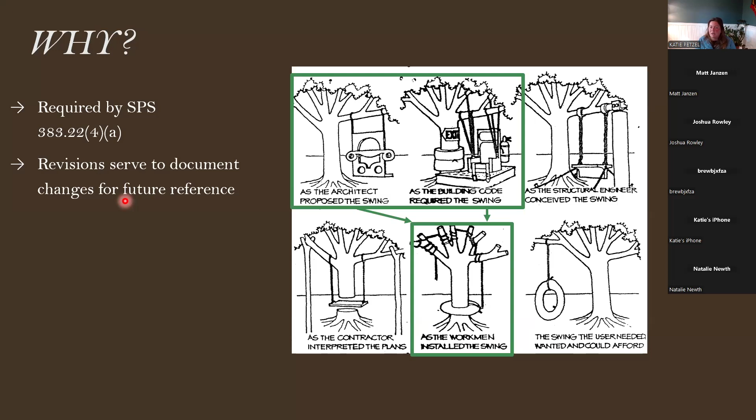But also we submit revisions so that they serve to document changes for future reference. So when we go and look at a system 10, 20 years down the line, or a new inspector or a new plumber looks at it, we actually see on the plans what is on the ground. And that is what plans should be. They should document, as that picture shows, how the workman installed, what the system actually looks like, how it actually functions, not how we dreamed that it would, but how it actually looks on the ground.

So here's the code section of SPS 383.22(4) revisions. And we'll go through this through the presentation. I'm not going to read it all out loud to you here. That would be boring, but we'll get through it all as we go. But as you can see, this code section actually is not that long, but it covers everything to do with revisions.

So when is a revision absolutely required? When does 383.22(4) say that revisions are required? Well, first, it is required absolutely when there is a modification to the design of a POWTS that has been previously granted approval, if it involves any of the following as we go along, and it should be submitted to the applicable reviewing agency for review.

So let's say a facility was originally designed for an office space, and they come to find out that what's going to be in the building is actually a restaurant, and the plan review is still active, the sanitary permit is still active. Well, they can do a revision, and they need to do a revision because the contaminant load from an office space to a restaurant is completely different.

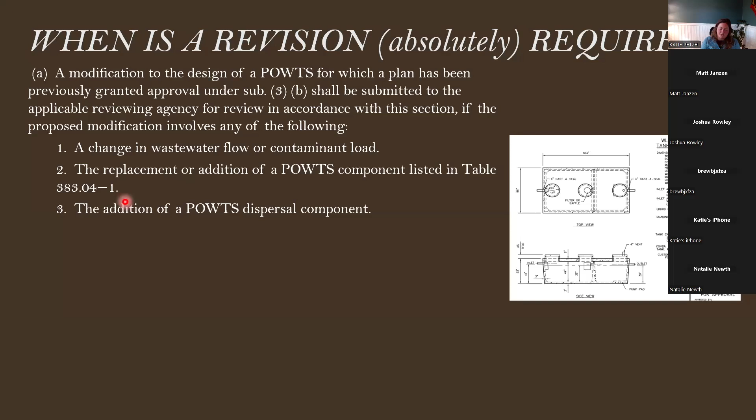Anytime there is an addition of a POWTS dispersal component, a revision is absolutely required. So if we were to have a holding tank permit, for an example here, a 1200-800, and we're adding the distribution dispersal component to it, then a revision is absolutely required. These are all pretty obvious, hopefully, but that one more so. But additionally, anytime there's a change to one or more of the dispersal components involving any of the following. So if the location of the dispersal component is outside of the suitable evaluated areas or proposed depths or elevations.

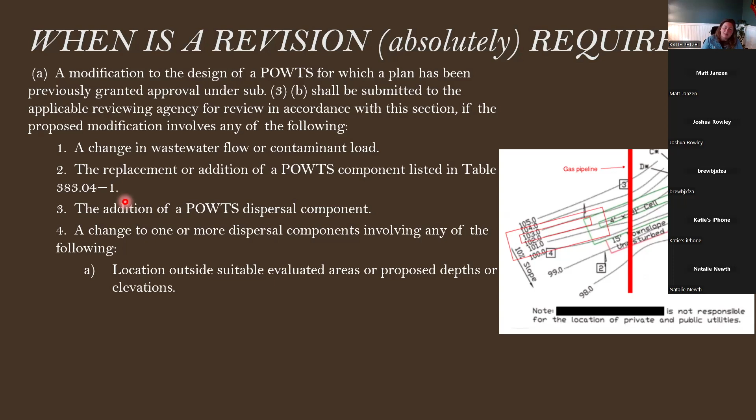So I have an example here that is completely made up. This is not a real scenario. But for example, if a soil test was done and it comes to be that there's an encumbrance there, so my made up scenario here is there's a gas pipeline where the cell was proposed to be, and it has to be moved. So the cell in this hypothetical scenario had to be moved outside of the tested area. It's still on the same contour, but additional borings will be required, and because of slopes and things like that, other things will have to be changed with the plan.

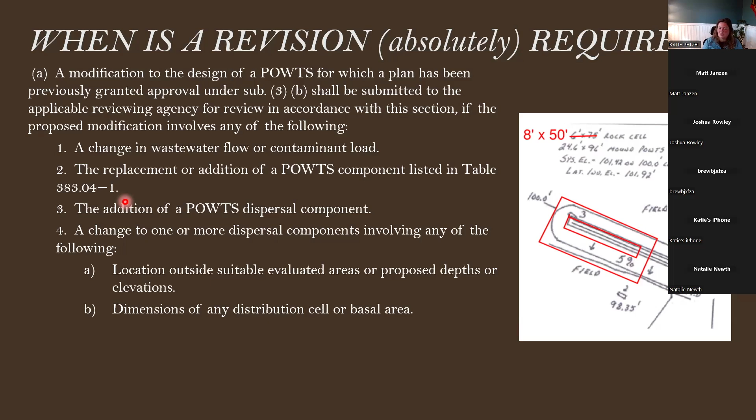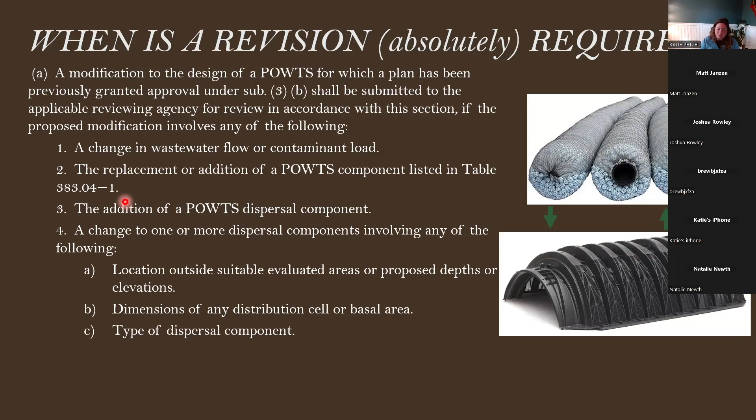Anytime there's a change to the dispersal component dimensions, anything with the distribution cell or the basal area. So my made up example here, we're going from a 6x75 rock cell to an 8x50. Now it's a change to the distribution cell dimensions, and it would be a change to the basal area, so that would require a revision. Anytime there's a change of the type of dispersal component, so an example here going from EZflow to infiltrators, that would be a change, but it could be anything.

Or a change to the design of a pressure distribution component, except for changes to pumps, force main lengths, total dynamic head, or pump control settings. So my example here, the plan hypothetically originally had 3/16 orifices, and for some reason was changed to 5/32. So that would be a change to the pressure distribution component, and it would require a revision.

But if there was a change to, say, going from one type of pump to another, that would not necessarily require a revision. Or if the force main length goes from 50 feet to 100 feet, it wouldn't necessarily require a revision. Total dynamic head and pump control settings, likewise, those do not require revisions. So now that we know when revisions are absolutely required, we're going to go through who it should be submitted to. So who is the applicable reviewing agency? So who is it?

Plans that must be reviewed at the governmental level are those POWTS that serve not more than two one- or two-family dwellings and their accessory buildings, and use gravity distribution for the effluent to an in-ground distribution cell and/or a component manual design. Additionally, it would be holding tanks that are less than 3,000 gallons per day estimated flow and our component manual reviews.

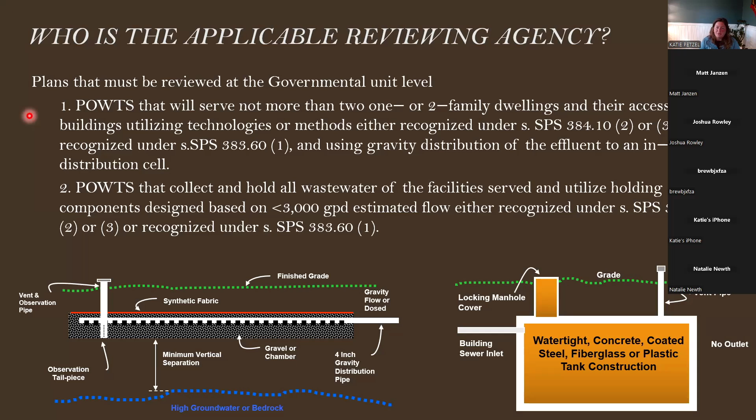So these are the applicable reviewing agencies. You're very familiar with these. And it's no different than who you would submit the plan review to. The revisions go to who the plan review would go to. So what plans can be reviewed either by the state, DSPS, or as a designated agent?

So these would be POWTS that completely utilize treatment and dispersal technologies that are approved under SPS 384.10(2) or (3) or 383.60(1). So those are the component manuals, and anytime that reference is in there, it's referring to the component manuals. So things like a standard mound, a standard at-grade, an Elgin mound, whatever. If it's a component manual review, then it can be submitted either to the state or to the designated agent if the county or local government unit, if you're in Milwaukee, has that designated agent status.

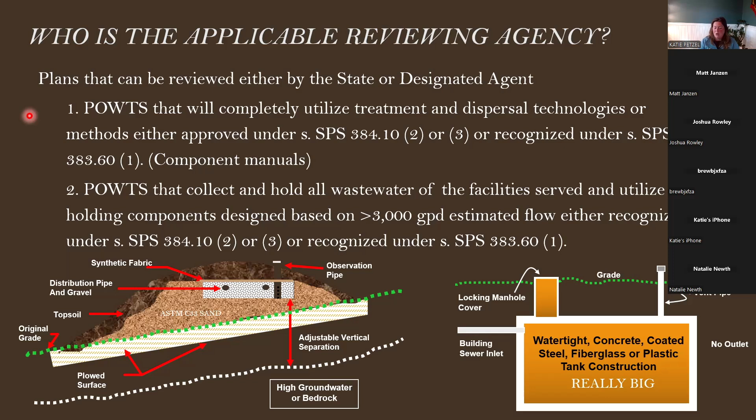Additionally, it could either be submitted to the state or to the designated agent if there is a holding tank that is a component manual holding tank that serves above 3,000 gallons per day. So just a really, really big holding tank. So those revisions would be submitted to those people in that case.

Also, any POWTS that treat domestic wastewater combined with industrial wastewater, which in the most recent component manual updates we made more clear that those are individual site designs, as well as experimental systems. So any of those plans that were reviewed at the state level must have their revisions submitted to them at the state level.

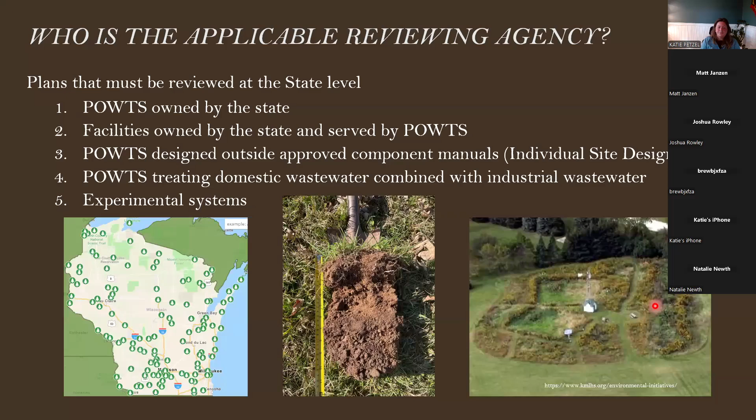Okay, so as a reminder, we're getting through the code sections here. They're not exactly in order, but here's section E. If revisions are submitted to and approved by the department, the owner of the site for the POWTS or the owner's agent shall file the revisions with the governmental unit which issued the sanitary permit. So that's there as a requirement that if you get revisions approved for a state-approved plan, then those revisions must also be filed with the governmental unit who issued the sanitary permit.

So in most cases, that's going to be the county. You have to submit your revisions to the county so that it's filed away with those original plans. Or if it's a state-owned project and state-issued sanitary permit, then it has to be filed with the state. If you're filing revisions to state-owned plans, it's all through eSLA. We all know where it is, so it's filed along with it.

Okay, so additionally, in that section, 383.22(4)(b), like I said, we're going a little bit out of order, but I thought this would be the appropriate order to talk about it. If there is a modification to the design of a POWTS for which a plan has been previously approved and has a sanitary permit, it may be submitted to the governmental unit which issued the sanitary permit if the proposed modification involves a change which is not listed in paragraph A, which was those major revisions that we went through, a change to the dispersal component, a change to the pressure distribution network.

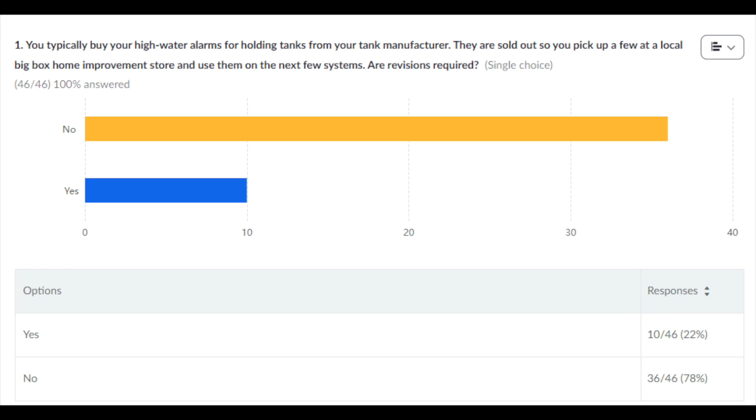The answer to this one is no. A revision is not required for this. Should it be noted on the inspection report and on the plan? Yes, but is a revision required per 383.22(4)? No. The high water alarm is not an approved product. It is what it is. It does its job, and if it can do its job, it should be noted what that alarm is, but a revision is not required.

All right, question number 2. Is a revision required? A house plan has changed from a full basement to a slab on grade. It was to be served by a proposed state-approved pressurized at-grade. You now have enough elevation difference to make a gravity at-grade work, and that is the preference of the homeowner. Is a revision required to go from pressure distribution to gravity distribution?

It's a change to the pressure distribution component, which there is no longer one. And even though it's the same component manual, pressure distribution to gravity distribution at-grades, it is a change, and it does require a revision. It could either go to the county if they're a designated agent for at-grades of both types, or it could go to the state if that was who originally reviewed it.

All right, and the third question here. Okay, so on this one, is a revision required? In conversation with the homeowners, you find that they have some rather unusual water usage habits. You decide what they are. You decide that switching from demand dosing to time dosing is best for the long-term performance of the mound component. The plan is state approved. Does this change require a revision to be submitted to the state?

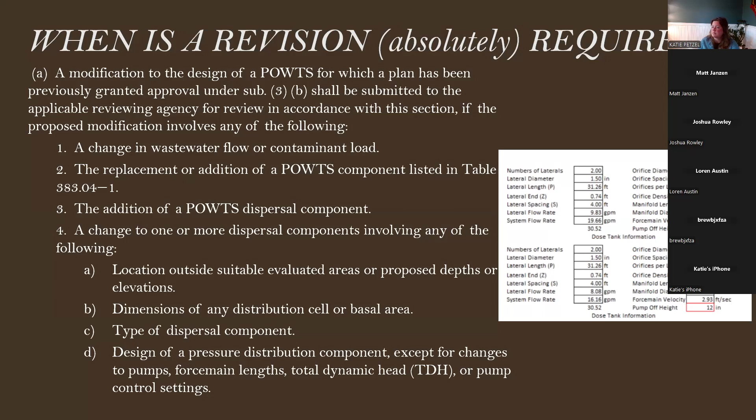So even though some things may not require an actual revision, we still have to make sure that we're noting any changes, or documenting them on the plans or during the inspection process.

Thank you, Matt. Okay, so now we got through when revisions are required and a little quiz on them. I thought it would be helpful because I do see mistakes with this at the state level, state revisions being submitted to the state incorrectly. So I thought it would be useful to go through a few screenshots on how you submit a revision for a state approved plan.

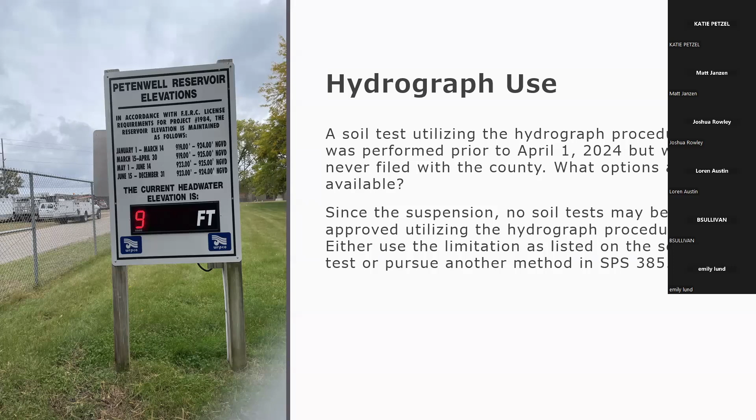State-owned projects. Katie did talk some about this. I've run into this a couple times this summer, but what's the procedure for installing a septic system on state-owned property? I should have had a quiz come up on, we should have put one in here about, what do you need to do? Well, the statutes and code don't differentiate between state-owned and private systems. So the only exception is that the counties don't have jurisdiction, but the state does.

So this means that you still have to do a soil test, still have to get an approved plan, you still have to get a permit, and you still have to get the system inspection. So just like a 3-bedroom home, you still have to go through all the processes normally to install a septic system. It's just that the county doesn't have jurisdiction, the state does. So you can do the soil test, you obtain the plan, we'll review the soil test at the time the plan is submitted. Once you get an approved plan, you have to go through eSLA and submit for a state sanitary permit through eSLA for that site.

And then the inspection will have to be coordinated with the district wastewater person to go out there and do those kind of inspections. So you still need all the same things that you would on any other kind of system. It's just that the county doesn't do the inspections, the plan review, or the permit issuance. Those all come back to the state.

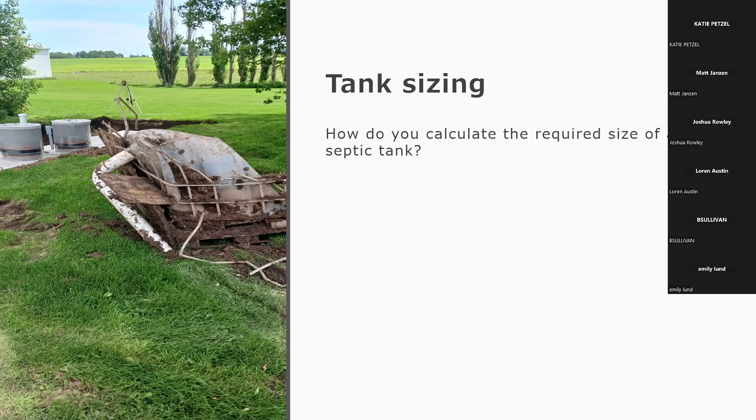All the tank product approvals list the maximum gallons per day for which a tank is approved. So if you look up a certain brand or manufacturer of a tank, XYZ, they will say that this tank is rated for X number of gallons per day flow. It's rated for, whatever, 750 gallons a day flow. So then you know that it's suitable for a 5-bedroom home or a 5-bedroom system, or a commercial facility that is under 750 gallons per day. However, sometimes we get these where we have a tank and maybe it's an older one.

It's still in good shape, but we don't know what the product approval is because it's not a currently made tank, or it's a manufacturer that's no longer in business. So how do we back calculate? If we say, hey, is this tank going to be big enough for me? I need to figure it out, but I know how many gallons it is. What's the size? You can multiply. There's a magic number, 2.088. That'll give you the size needed.

So for example, a 450 gallon per day system, a 3-bedroom home, times the 2.088 would give you 940 gallons. So that would be the minimum size tank for a residence. But remember, this is for the 3-year service frequency. So I do have the formulas out there. If somebody's interested, I can share that with you.

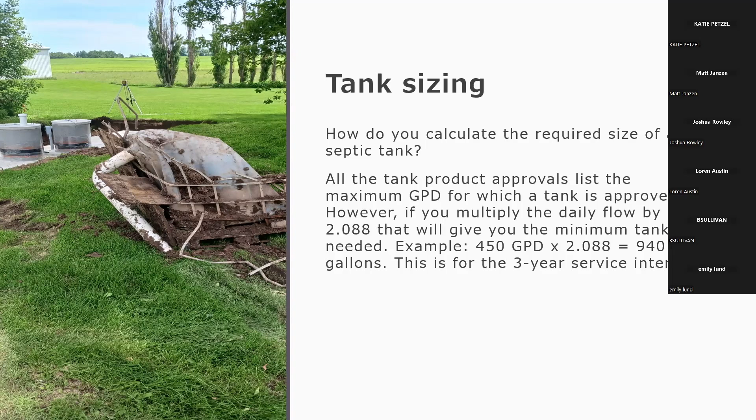If you want to calculate out different service frequencies or things like that, or if I have a tank that's only 900 gallons, what would be the service frequency on that if I want to do a 450? But the basic one that you need to remember is 2.088, and that times your daily wastewater flow will tell you how big of a tank you would need.

Had some questions about what's the proper license required, who can do plumbing on the building sewer from the building to a septic tank. So in all reality, POWTS or septic systems start at the septic tank. So everything before that is general plumbing. It's not really the POWTS. So we have questions about building sewer. It's sort of this in-between no man's land.

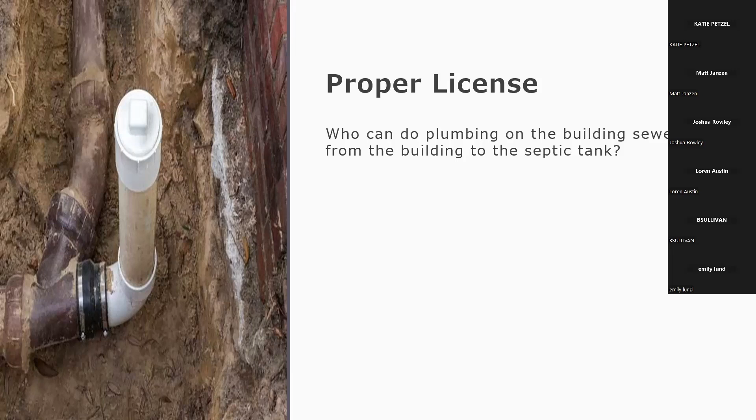Inside the building we know is general plumbing, and outside the building is something different in the building sewer until we get to the septic tank, and that's where a traditional septic system starts. So who can do that? Well, a full plumber. If you've got your full license, you can do that. Restricted service master plumber restricted can do that. They can work on building sewers also, and also pipe layers. It's something that we don't think of very often, but a pipe layer could also work on that building sewer.

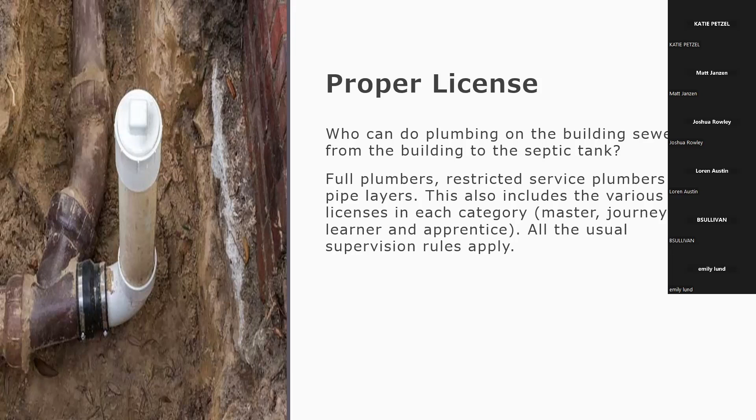And it also includes the various licenses in each category. So if you're a full master, a full journeyman, full learner, or a learner, or an apprentice under there, all those could work. Or if you're restricted journeyman, or somebody working underneath them. So all the usual supervision rules apply. I'm not going to get into who has to be out there, but that's who can work on a building sewer.

So we've had these questions come up a few times over the summer and spring. I've had my sand tested. Does it meet ASTM C33? And then I'll usually get an email or somebody will send me the sand curve graph, or they'll have the data for sieve size 200, this is what passed. And they'll say, tell me, does this mound sand meet or not meet? Well, it's not up to us at the state to decide that. It's up to the lab to decide that.

So there is an ASTM C33 standard that's published. The labs that test to these standards subscribe to the ASTM database, and they know what the criteria is. So if you took a sample to a lab, or if you're a county saying, hey, I got this lab sample and they want to know if it meets or not, the lab has to test according to that standard. So the lab result should state if the sand met all the required sieve sizes. So you don't have to come to the state for an approval for that.

Our code says you must meet ASTM C33 standard, and it has to be washed. We've got a couple other things in there, but it has to meet that standard. So you as a pit owner need to have evidence that the sand meets the standard. So if the lab's not providing that, then you need to go back to the lab and say, okay, you tested it according to the standard. I need to know, does it pass or doesn't it? And they should say whether it does or does not meet the standard.

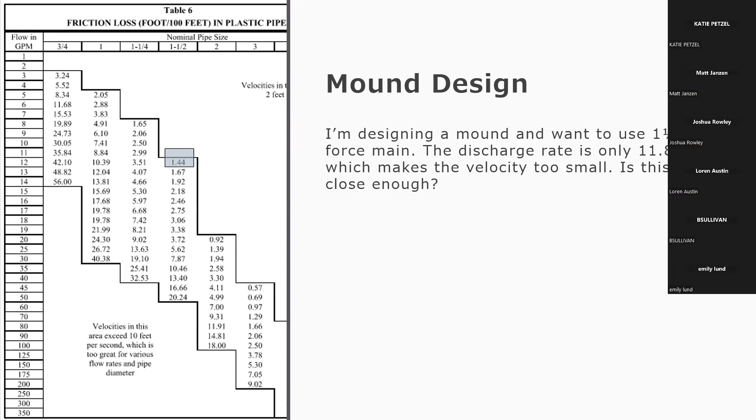We're not going to scour out the pipe. We could have some buildup in there. So can I do that? Is it close enough? Can I just round up or not? Well, yes and no. Well, technically, no. If the velocity is too small, then the design needs to be changed. If we're not over 2 feet per second, we're not going to have that scouring, and we need to redesign it.

However, we also have to remember that these numbers are based off the gallons per minute flow calculated using minimum head pressure. So most likely your pump is not being sized right to the minimums. And if you design using a higher head pressure than the minimum, you just bump it up a 1/2 foot or even a foot, probably the 1/2 foot will be enough. And you recalculate that,

how many gallons per minute are being discharged for your holes, you're going to have a higher flow, a higher gallon per minute total flow, which means you're going to be over the 12 probably now, and you're going to be able to use that 1.5-inch pipe, because now your velocity is going to be higher than the 2 feet per second, and you'll be able to calculate that.

So yes and no. If you don't meet it, no, you can't do that. But if you look at it a little bit differently, designed using a little bit higher head pressure, you're going to have a higher flow, which means you're going to be over a velocity of 2 feet per second, which means it's going to be okay.

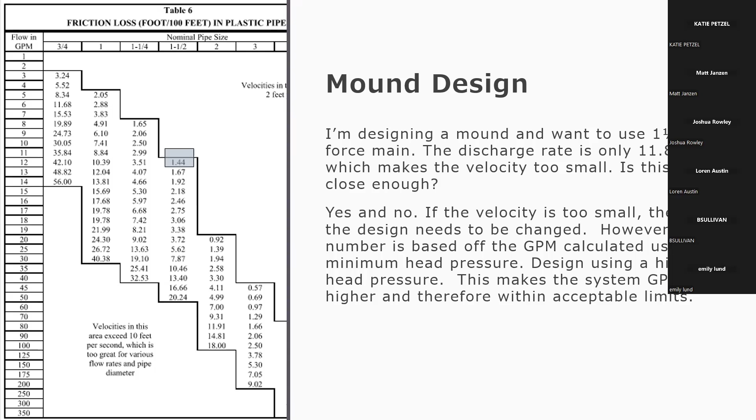Had this question come up, high strength waste. I'm designing a system that has potential high strength wastewater. It's going to a holding tank. What's required to reduce the strength? Or I've had the question, can we just call it an at-risk system? And can we install it that way? Well, the high strength wastewater is only a concern if it's going to a soil-based system. So if we're going into a holding tank, it's sort of irrelevant if we have high strength waste.

I've had this question about, well, we've got especially a commingled waste that's industrial, a butcher plant or something like that, or a bakery, and we know it's high strength waste and you're manufacturing some food, can I be an at risk, or what do I have to do? Well, it doesn't matter. If we're not going to a soil-based system, that's where our concern is for high strength waste, because all our design rates are based on residential strength waste. So if we're higher than that, it's not a concern for us.

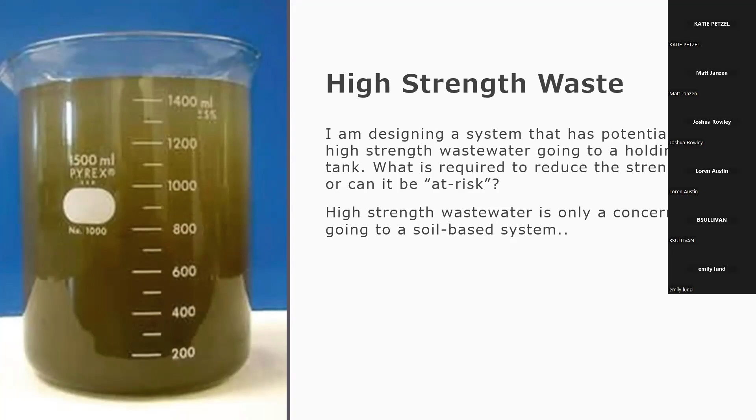In the design itself, there may be some concerns about, do I have a wastewater treatment plant that's going to accept this wastewater? That's a whole different issue. But we really don't classify holding tanks as high strength or at risk, because it's irrelevant. We're not going to a soil-based system.

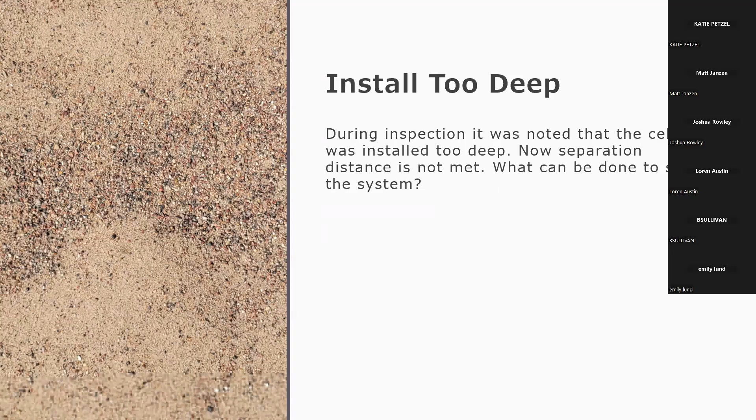Had this question, what happens if my install is too deep? So during inspection, it was noted that the cell was installed too deep. Now the separation distance isn't met. What can be done to save the system, or what can we do? Well, the separation distance has to be met, so we can't install a system that doesn't meet it. So there's some possible options.

I've had some where they can revise the soil test to show deeper soils if no limitation exists. So maybe we're not meeting our separation distance because the borings just stopped. We've got sand that runs forever, but they only tested X number of inches deep, and now the installation's too deep. We only have 32 inches separation. Well, if you go out there and auger down farther, or show that we do have suitable soil below that, you could put it in that way, if that's an option. You can always move the system to a new area and start over. Sometimes that's the only option.

We could add a treatment device which receives vertical separation credit. You could do that possibly. So they only need a 2-foot separation instead of the 3-foot, if that would make it code compliant.

Otherwise, I have seen in a couple cases what they'll do is they'll remove the cell back out, so the chambers or EZflows, or it'd be worse if it's gravel out there, a little bit more difficult, but remove the cell that's been installed, and then you'd add a sand blanket.

So for instance, in that case, we only have a 32-inch separation. You could add a 6-inch sand blanket, so the 32 plus 6 puts us over our required separation distance. We'd be at 38, and then you install your chambers or your EZflow or whatever, or pipe and gravel on top of that sand blanket, and that would make our separation distance.

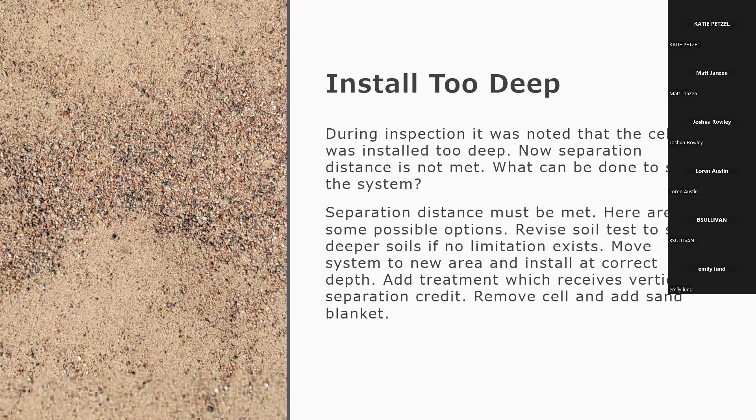But then again, like we talked about before, Katie had mentioned, if you're installing a sand blanket, now we're going to have to go through revision. Obviously, we're changing the design, things like that. So, but that would be an option for you to get out of that circumstance.

Apprentices. Does an apprentice need to be directly supervised? So we've had this question that, we have an apprentice out at the job site, master plumber is not there, there's no journeyman, the apprentice is left alone. Can they be out on a job site alone? Do they have to be directly supervised by somebody?

So no, they don't have to. If the master in charge, that apprentice is working under, deems the apprentice is capable, then they can be at the job site unsupervised. So they don't have to be out at that job site with a supervisor. They can be on their own.

But what happens if we are in a floodplain? Not in a floodway. Floodways are different, but if we're in a floodplain, flood fringe, and we need to be up above that, do we have to be up above? I've seen some where we've had these chimneys like this, where you've got manhole risers going up 10 feet. Is that necessary or not?

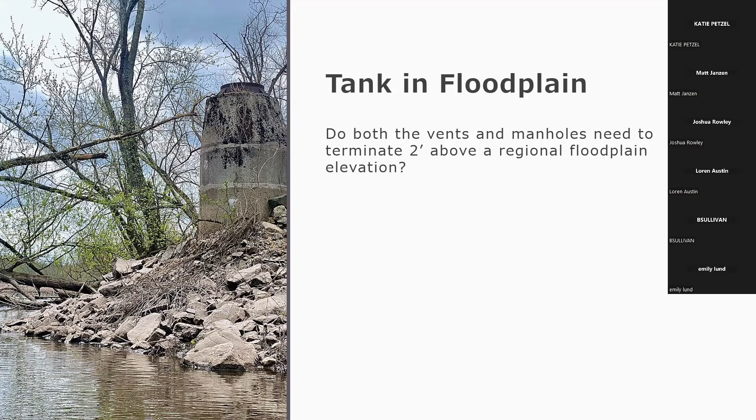Well, no. The vents, because they have to remain open, they have to be above the regional flood elevation. But manholes can be made watertight. So if we have something from a manufacturer that states they've got a rubber gasketed seal and they can be locked down so that there's no water infiltration in them.

If we get something from the manufacturer that states they can do that, then we can have the manholes below the regional flood elevation as long as they are able to be sealed and made watertight against floodwaters. Then they can be below the 2-foot elevation. Otherwise, if they can't be, then they have to be 2 feet above the elevation.